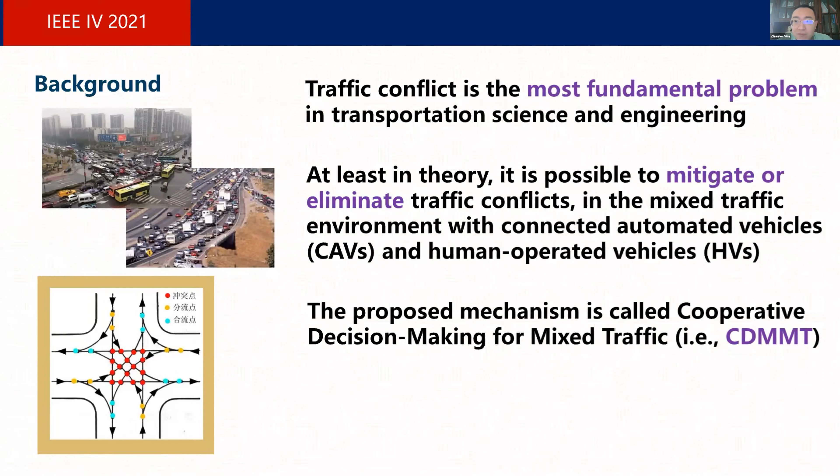I personally call this problem cooperative decision making, and of course it's also related to control. My group calls it CDMMT, cooperative decision making for mixed traffic. That's the background of this problem. I presume most of us know this well because we are from the same field.

We're talking about different levels of automation for connected automated vehicles and different levels of connectivity. In academia, people are focusing on different things compared to the industry. From my perspective, we focus on the problem with higher level of connectivity and also automation. I keep tracking some of the news related to connected automated vehicles, so most of us know these news or problems well.

There are some key challenges, including technical difficulties such as hardware, sensing technologies, communication, and also mixed traffic, which really makes the problem much more difficult because now we have people involved, and we know humans are myopic, stochastic, and usually non-cooperative, which really makes the problem very difficult.

The key message I want to convey here is, from the system perspective, we really want the system to be efficient. By saying cooperative, we really want the system to be improving, because cooperation is not necessarily system improving. In some cases, for example in this ramp merging scenario, we have a ramp vehicle trying to merge onto the main line, but to ensure this merge activity, we may want a platoon of vehicles on the main line to slow down, and that case is not necessarily system improving. So what I want to say is, to design efficient control technologies or decision-making strategies in mixed traffic environments, we really need to pay attention to the system efficiency problem.

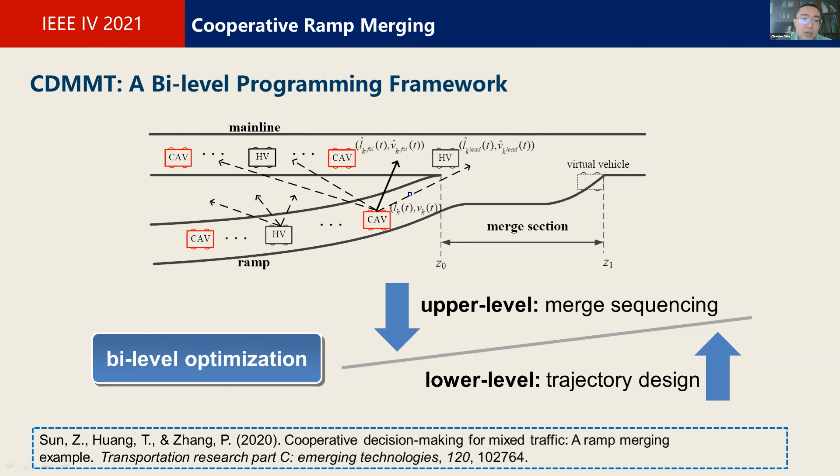In this ramp merging scenario, we think this problem can be modeled by a bi-level programming framework. In the upper level, it's essentially a merge sequencing problem, in which the CAV tries to seek appropriate gaps on the main line to fulfill the merge maneuver. The lower level problem is essentially a trajectory design problem - how to design the trajectories. So essentially that's a bi-level optimization framework.

So basically the upper level, that's the merge sequencing. Let's look at this problem. If you know this problem well, it's essentially equivalent to: we have a couple of gaps on the main line, and we try to decide which gap for a target vehicle to merge. This problem can be very well addressed using the dynamic programming framework.

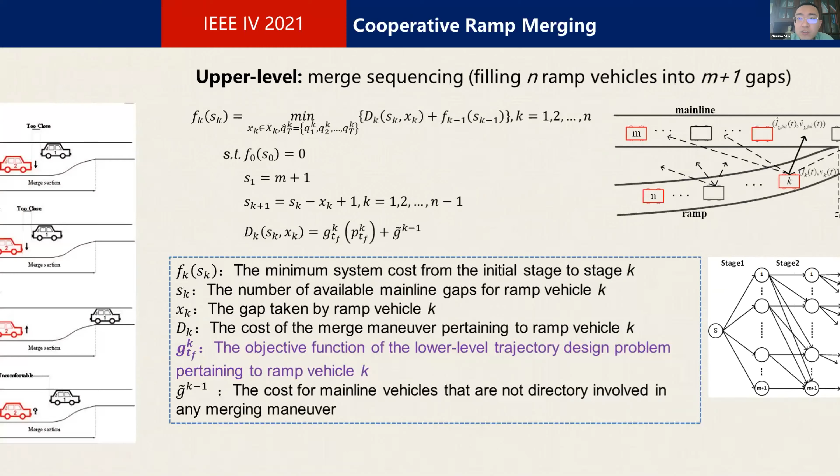So that's some dynamic programming formulations, but I don't want to talk too much on the mathematical details. Also in the mixed traffic environment, the harder part is we need to capture all possible scenarios that can potentially occur. In this case, we categorize basically 13 scenarios that can possibly occur in the mixed traffic environment.

So with respect to the mainline leader, the mainline follower, and the target vehicle, which is the ramp vehicle - the vehicle could be autonomous vehicle, represented by A, or human operated vehicle, represented by H here. Also in some cases, there are only 2 vehicles involved in each merge maneuver, and in that case we have a placeholder N here, for scenario 8 up to scenario 13. So those 13 scenarios should capture all possible cases that can appear in this car-following context.

And also with respect to the reason why a ramp vehicle - let's say vehicle 2 - cannot easily merge onto the main line, there are also some possible scenarios. For example, this ramp car could be too close to the mainline leader, or too close to the mainline follower. So there are essentially different reasons that prohibit smooth merging for this problem, and we need to explicitly consider all those scenarios.

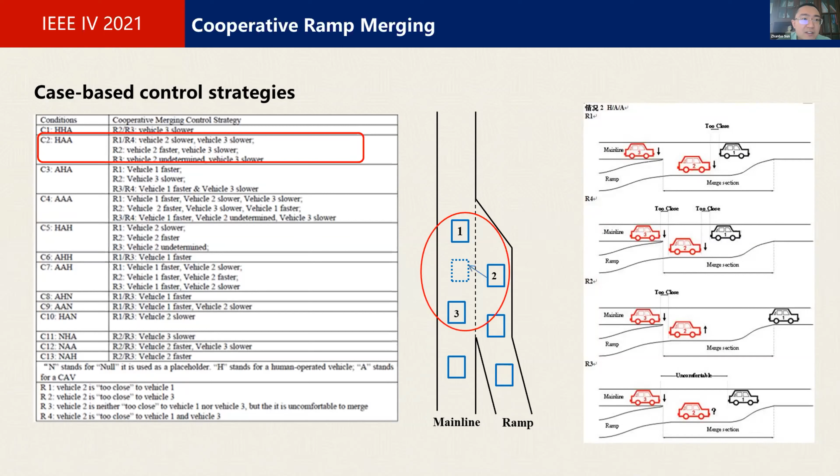So with that, the lower level problem is essentially a trajectory design problem. In this case, we are looking at multiple vehicles involved - could be 2 or 3 vehicles involved in each lower level problem. So we are also formulating this using a DP type of approach. The harder part is essentially the modeling of the final state constraints, which is related to the lateral dynamics. But in this work, we didn't really consider very complex, detailed lateral control here.

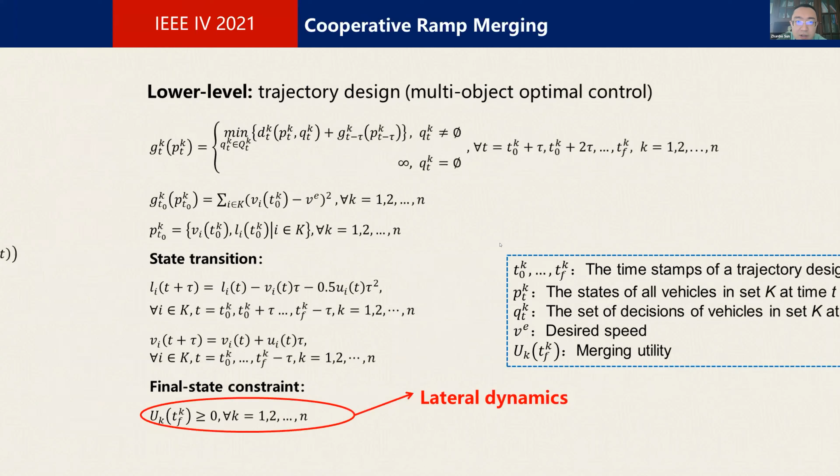So that's for when we have 3 vehicles involved: vehicle K, that's the ramp vehicle; vehicle K-lead is the mainline leader; vehicle K-follow is the mainline follower. We basically consider, for all these scenarios, in which scenarios vehicle K could be non-cooperative, could be controlled, could be faster, slower, and undetermined. We list all these possible options.

The lateral dynamics here could be a complicated problem, but here we consider a discrete choice - literally a ramp merging decision: lane change or merge. For the longitudinal dynamics, we tried basically different car-following models, including some well-known models like Gipps model, IDM, EIDM, and also some intelligent driving car-following models such as deep learning-based methods. In generic form, it can be written in this unified formulation.

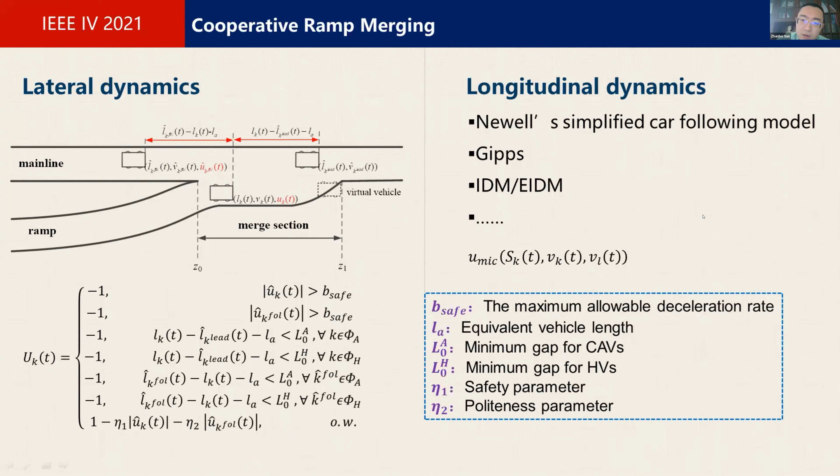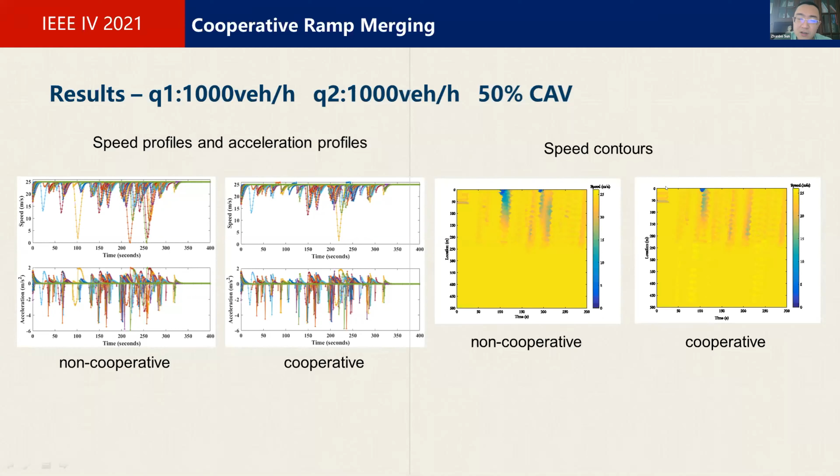To skip most of the mathematical details, let's directly come to the results. Here we show basically the speed-time profile, and also the acceleration-deceleration profile. We show that the cooperative case is much better compared to non-cooperative scenarios, and also in terms of the speed contour, which also shows that the cooperative case is much better.

For the following papers, I only want to talk about these very briefly, because I have limited time. In the first work, it's basically a deterministic scenario. As I said, the difficulty is really the system stochasticity, which is not quite considered in the first work. Also the computational efficiency is a problem, because eventually we are looking at some real-time control or real-time application.

So the solution to this is we look at closed loop control, in this case a model predictive control, and also to ensure computational efficiency, we basically propose a so-called hybrid centralized-decentralized system, because the previous work is mainly centralized. Here we propose a hybrid system that we show can solve this problem faster. Also for the lower level problem, it's an NP-hard problem. Here we use a computationally efficient solution approach to solve this lower level trajectory design problem. Okay, so let me skip.

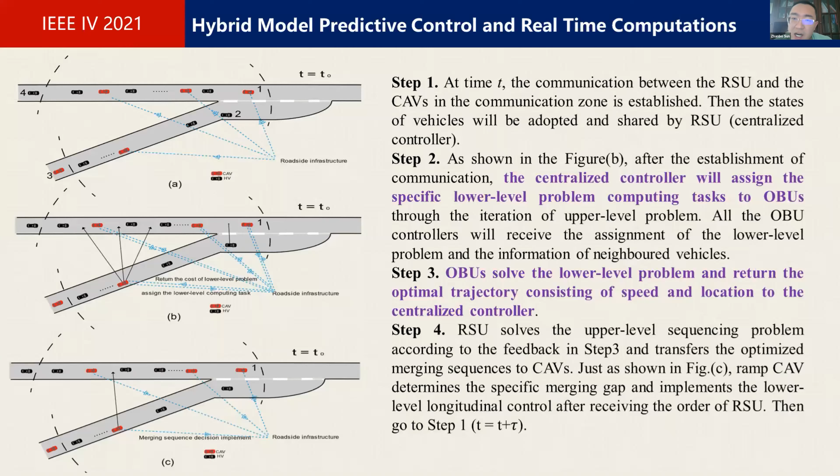So the idea here is we use some hybrid control. We have a centralized controller and a bunch of OBUs on each autonomous vehicle. The centralized control solves the sequencing problem and then passes the lower level computational tasks to each OBU on the smart vehicles. The smart vehicles solve the lower level problem and return the solution to the upper level. This hybrid approach can take advantage of the computational power of each smart vehicle.

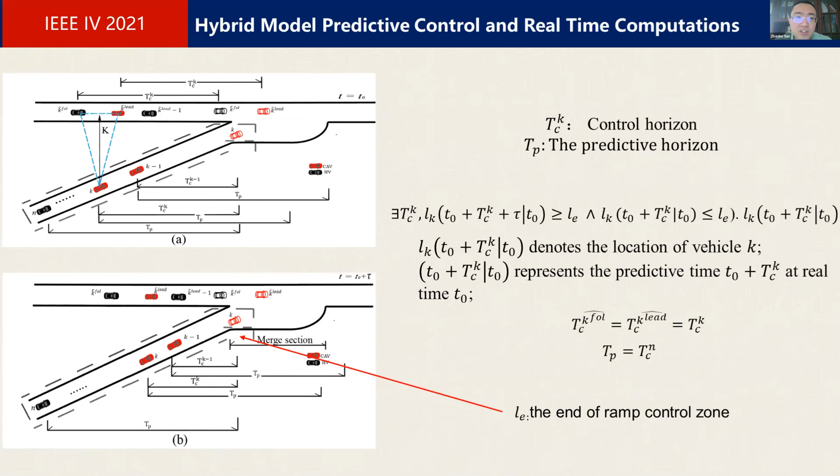Okay, let me skip this and come directly to the results. So basically, we use hybrid control, and we also test this closed loop MPC framework. We show that the MPC approach is more robust compared to open loop control, and also much better compared to the non-cooperative scenario.

Briefly, we are very excited about this concept called microscopic right-of-way trading. In previous work, we usually assumed that CAVs can be designed to be cooperative, but this conflicts with the self-interest nature of humans. So in this case, we assume vehicles can be categorized into cooperative and non-cooperative vehicles. We believe both CAVs and HVs can behave cooperatively if enough incentive is provided. Otherwise, without incentive, it's not safe to assume CAVs will behave cooperatively.

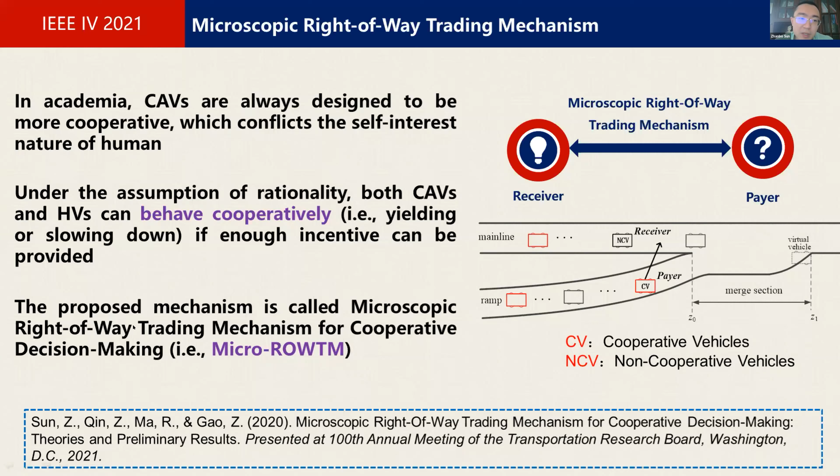So this mechanism is called microscopic right-of-way trading. We are talking about right-of-way trading in mixed traffic, at the microscopic level rather than tradable road tickets as used in traffic management. It's a game theoretical approach - we need to address the trade-off between individual rationality and system efficiency, and design the problem for incentive compatibility. Here we use the dominant strategy incentive compatibility approach, which can guarantee minimization.

These are just some brief definitions. We assume the ramp vehicle could be a payer, offering money to the mainline follower who's going to behave cooperatively, and the receiver is essentially the mainline follower who's going to behave cooperatively. There are a couple of rules we tested - for example, equal allocation, which allocates the total revenue equally among the two participants. There are also other rules, some more advanced in that they can minimize envy.

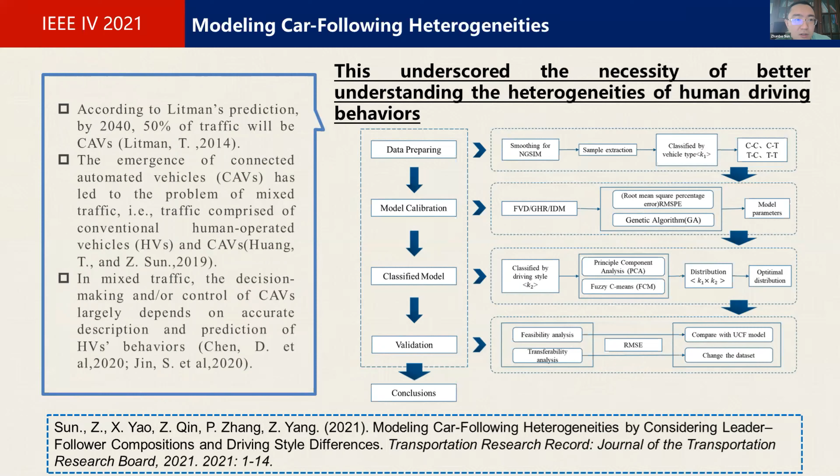I think I still have a little time, but let me quickly go through this. So modeling car-following heterogeneity is for better short-time trajectory prediction. Let me just quickly scan through these things. We came up with a statistical modeling based framework that can be used to better describe the heterogeneity of human driving behaviors in a microscopic sense. Let me quickly scan through this part too. For short-term trajectory prediction, this is a hot field because people are using deep learning methods for trajectory planning and trajectory prediction.

In the aforementioned cooperative decision-making tasks, these basically rely on accurate estimation and prediction of trajectory in the short term. The predicted trajectory serves as a key input to our previous problems. So in this case, we use a graphic representation learning method combined with LSTM for short-term trajectory prediction. The key here is that graphic-based representation learning can better capture the spatial interactions between vehicles on the road, which is more intuitive compared to black box deep learning techniques.

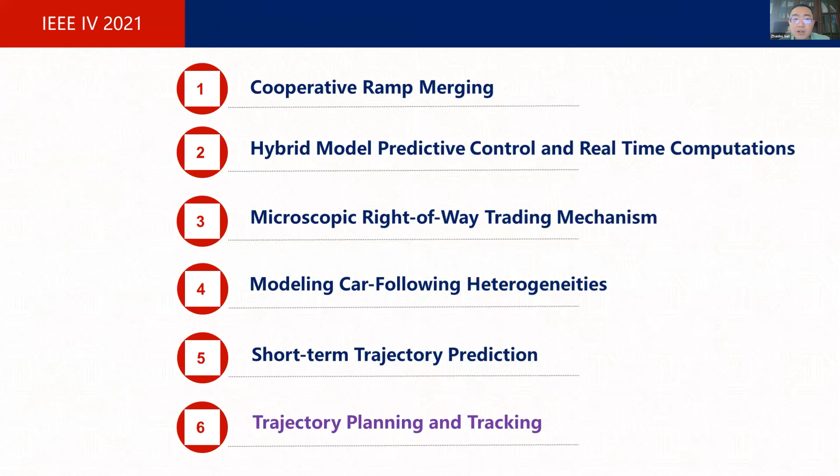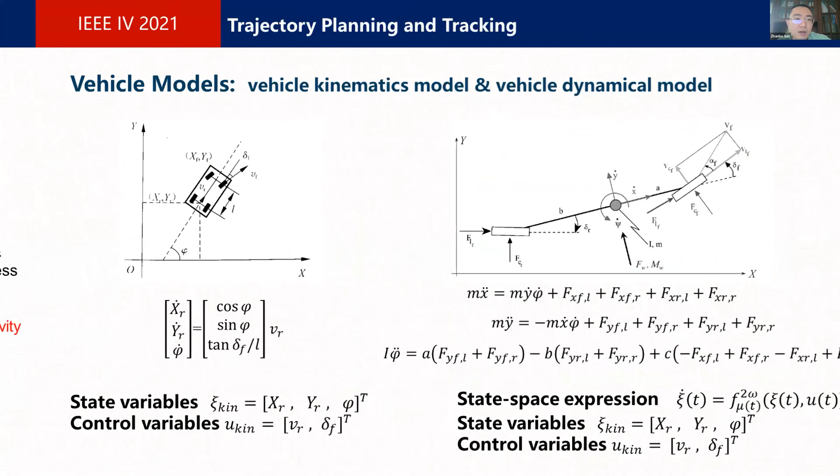Quickly scan through this part. So for all these five topics that I mentioned before, they're mainly on the decision-making level. The last part is essentially trajectory planning and tracking, which is more on the technical level. But since I'm running out of time, I'd rather skip that part, because I want to leave more time for questions.

So the future directions may include some integration of trajectory planning and trajectory tracking, considering trajectory replanning. Also, we're talking about time delay systems if we want to really implement this in real time, so that time delay problem has to be considered. And also there are some challenges in microscopic right-of-way trading, and the stochasticity in the problem needs to be better encapsulated. We also want to generalize this problem to other scenarios, including intersections and so on, and road test experiments, because the above discussions are mainly based on simulation and numerical results.

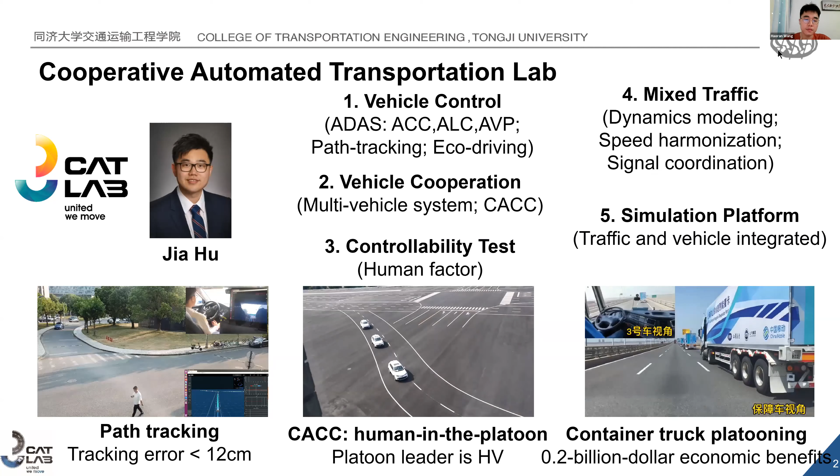Now I will give my presentation on CACC lane change. It covers the following aspects: motivation, methodology, and evaluation. At first, I want to give the motivation of my CACC lane change controller.

Transportation is now facing 3 main challenges: mobility, safety, and sustainability. Traffic congestion problem is increasingly serious all over the world. Over 400 cities in 56 countries are experiencing increasing levels of traffic congestion. Because of traffic congestion, people spend more time compared to free flow periods. Reports show that 5.5 billion hours of travel delay and $121 billion cost every year is caused by the traffic congestion in the US.

Safety problem is also very severe. Reports show that over 37,000 traffic fatalities are caused in the US in 2017. Traffic crash has been the leading cause of death for ages from 11 to 27. Here we list the main cause factors of crash. Most of the factors are driver related.

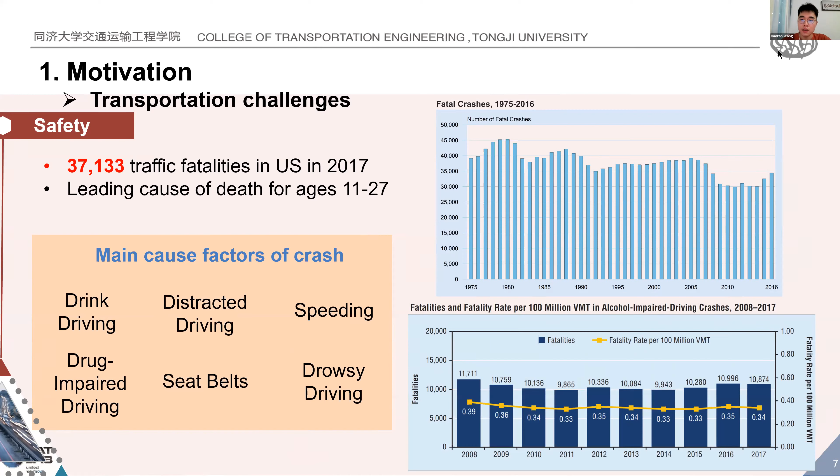As for sustainability, road transportation leads to 2.9 billion gallons of wasted fuel and 56 billion pounds of additional carbon dioxide every year. In order to address these challenges, cooperation is given great expectation. Cooperation among pedestrian, vehicle, and infrastructure could be achieved by portable smart devices, CAVs, and intelligent transportation systems.

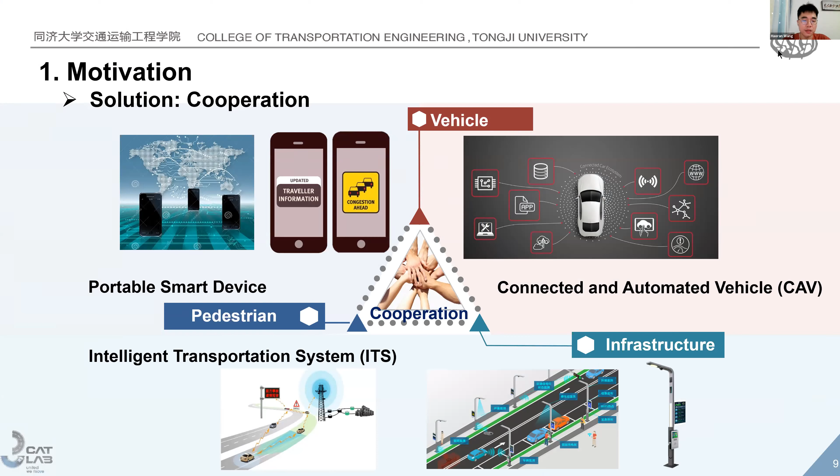As an important application of CAV, CACC, cooperative adaptive cruise control, is now in rapid development. CACC is proposed by adopting V2X communication added to ACC. Conventional ACC could reduce driving load and improve driving experience. CACC is expected to bring more positive effects. Smaller headway will benefit driving mobility. Adopting these technologies may achieve sustainability, and automatic control will reduce driving error and improve driving safety.

However, conventional CACC is longitudinal only. By enabling CVs in a platoon with lateral control, CACC is now given a new opportunity: CACC with lane change capability.

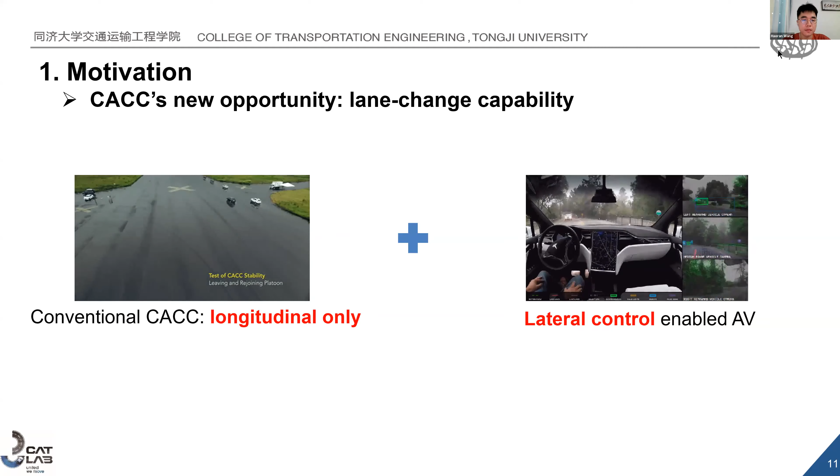Let's consider these scenarios. First, the scenario on the left: the dark blue vehicles are CVs in platoon. The white vehicles are surrounding human-driven vehicles, mixed in the traffic. It is very usual that there is a slow-moving HV in front of the platoon. In this scenario, a longitudinal-only CACC would cause great loss of mobility.

The scenario on the right illustrates another case. The dark blue CVs are in platoon, and they must change lane and run into the off-ramp. If the system is without lane change capability, the platoon has to be disengaged. This may break the control continuity.

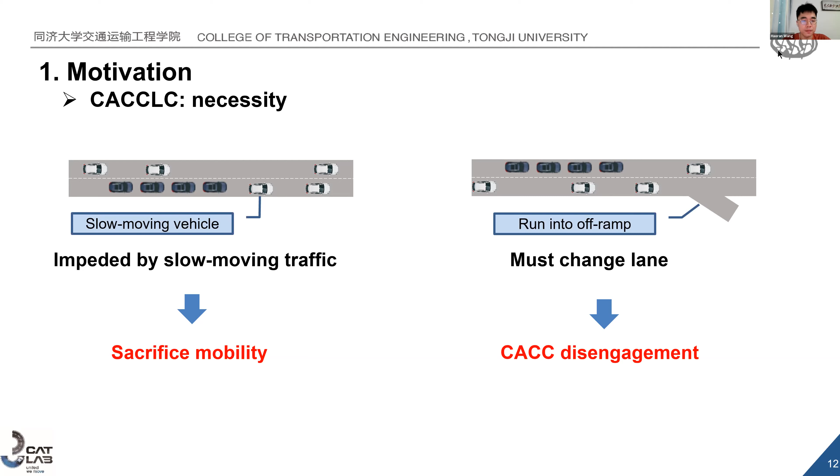Now we consider the scenario aforementioned in the right figure. We assume a platoon with 5 CVs. Following headway in the platoon is 1 second, and the cruising speed is 30 meters per second. 5 multiplied by 1 multiplied by 30 equals 150. Therefore, the length of a platoon in cruising is over 150 meters. It means a 150 meter gap shall be found to make a lane change.

This gap indicates 10.75 traffic density, the level of service A. We can see that in this case, the conventional simultaneous platoon lane change method can only be applied in traffic with level of service A. This greatly limits the implementation of platoon lane change. So the conventional SPLC method has low change capability.

Considering these limitations, we propose a new CACC lane change controller. This controller is capable of making space to change lane.

At step 1, a gap should be selected even if it is not enough for a single vehicle's lane change. At step 2, the last CV changes lane to the gap. At step 3, the last CV slows down to open the gap. At step 4, the gap is enough to hold one more vehicle, so the last but one CV changes lane.

Just like this, all CVs in the platoon could change lane into the gap in turns. This method ensures the lane change process won't be interrupted. It is nearly with 100% success rate.

Applying this concept, we now propose a platoon lane change controller. Its methodology is presented in this section. This figure shows the control framework. It consists of 3 modules.

Module 1 is in charge of platoon decision making. It decides the gap to be selected for the lane change, and the information of vehicles, including CAVs and HVs, are passed to Module 2.

Module 2 is the planning module. It plans trajectory by the proposed CACC lane change controller. Module 3 receives the control command from Module 2 and actuates the control commands.

Applying this framework, we show the developed platoon decision maker and the CACC lane change controller.

Since the front CAV should follow its rear CAV to change lane, a new information topology is proposed here. In this topology, information is passed from the rear CAV to the adjacent front CAV.

A simple rule-based platoon decision maker is proposed. It includes lane change decision making and desired speed decision making. A gap enough for a CAV lane change maneuver could be used for the platoon lane change.

For the desired speed decision making, it follows a simple rule. The last CAV changes lane at a speed same as the rear HV. When the last CAV finishes lane change, it should decelerate to open the gap.

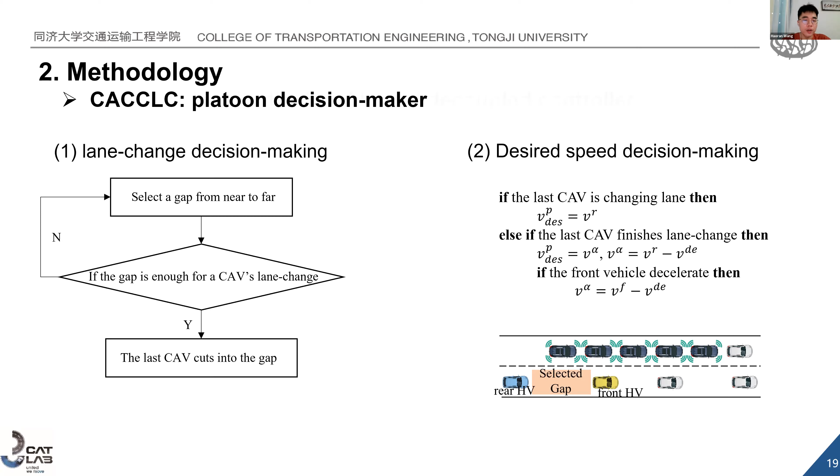We then propose a longitudinal and lateral decoupled controller, the CACC lane change controller. Speed and gap error with respect to the rear adjacent CAV are selected into the state vector. Heading error and lateral position error are selected into the lateral state vector.

Acceleration of all CAVs is selected as the longitudinal control vector. Front wheel angle is selected as the lateral control vector. Moreover, a linearized vehicle dynamics model is adopted.

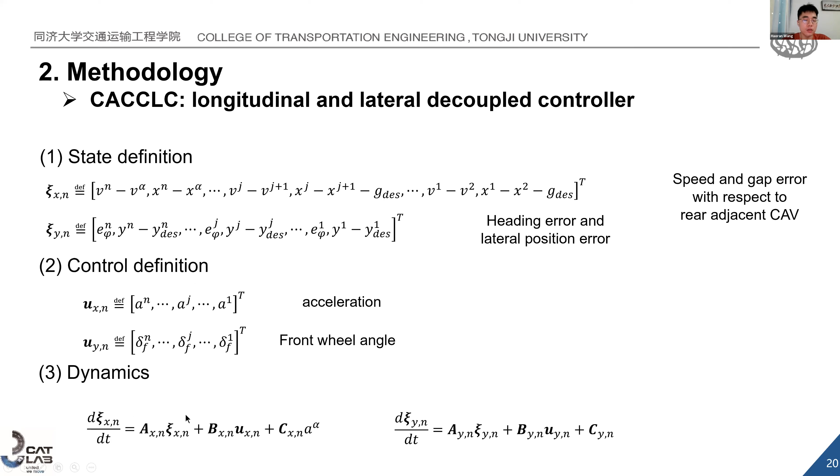Cost functions are given in quadratic forms. The longitudinal objective is to minimize speed error and gap error with respect to the rear CAV. The lateral objective is to change lane at the desired position.

Moreover, we have proven this CACC controller is with string stability. Oscillation won't increase from the last CAV to the first CAV along the communication topology.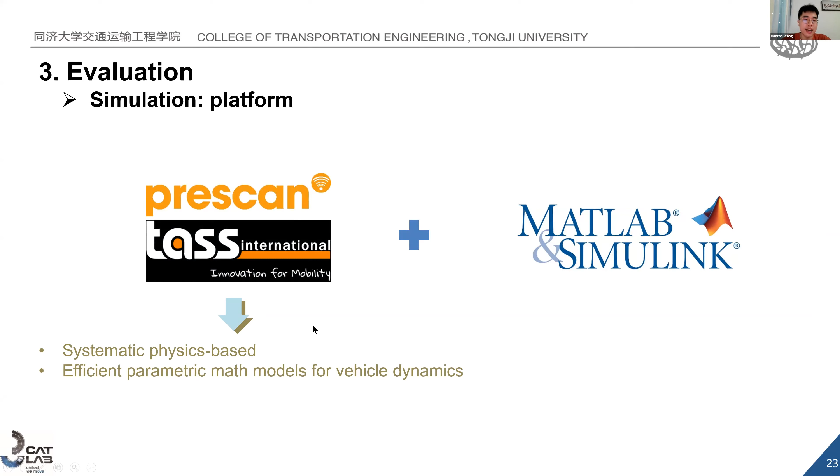At last, the CAV platoon lane change controller is evaluated on a simulation platform joint with PreScan and Simulink. PreScan is an ADAS and IV system simulation software. It follows a systematic physics-based simulation approach. Efficient parametric math models reproduce system-level dynamics behavior.

This simulation is with two objectives. The first objective is function validation; it should verify the function of making space to change lane. The second objective is string stability evaluation. The following gap error is adopted as the measurement of effectiveness.

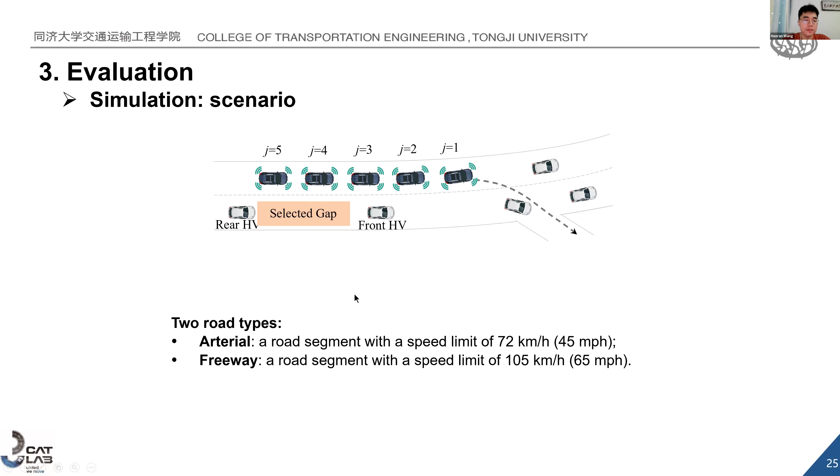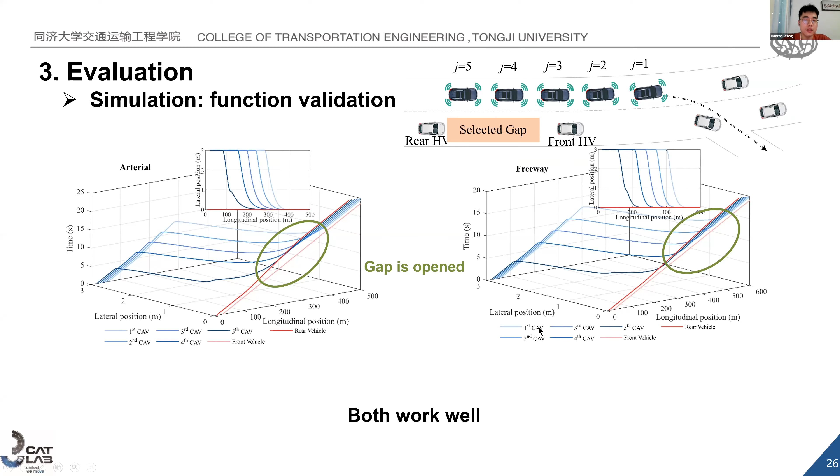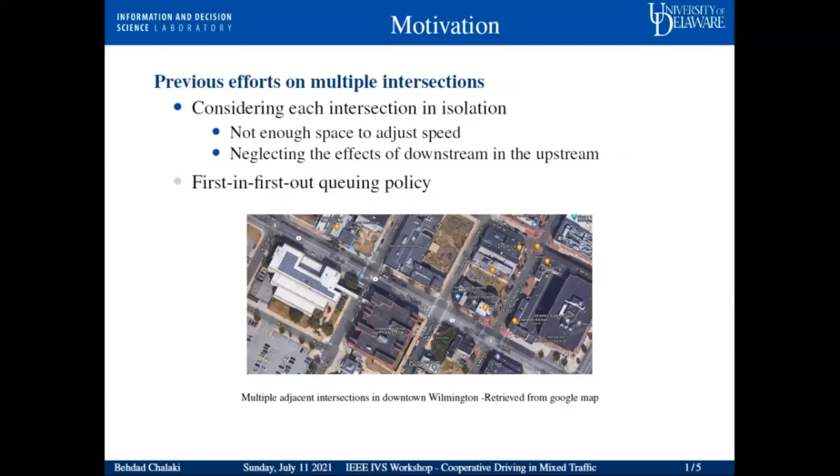Also, another approach which is very popular in single intersections is using first-in-first-out queuing policy, or FIFO, to find the arrival time at the intersection to avoid lateral collision. But this approach would be degraded if we have asymmetric geometry or asymmetric traffic flow. So if from one leg of the intersection we have high traffic flow compared to other legs, FIFO would perform worse than the scenario when we have symmetric traffic volume.

So the problem we're trying to address: we are looking to find a decentralized coordination framework for CAVs at full multi-lane signal-free intersections to improve traffic throughput and energy efficiency. We are also allowing vehicles to choose the best lane to improve the throughput of the system. And we further extend our framework to include the steady state error that may occur in tracking the optimal trajectory at the vehicle level controller.

So we are considering two intersections which are close in distance from each other. We have an area where vehicles can communicate with each other, called the control zone. There's also a red area at the entry of this control zone, where vehicles may change lanes based on the throughput of the system. So if changing lane can improve the throughput of the system, they do so. We also have two regions where vehicles may have lateral collision, called merging zones. This is one example for two intersections; we generalize this for multiple intersections in the paper.

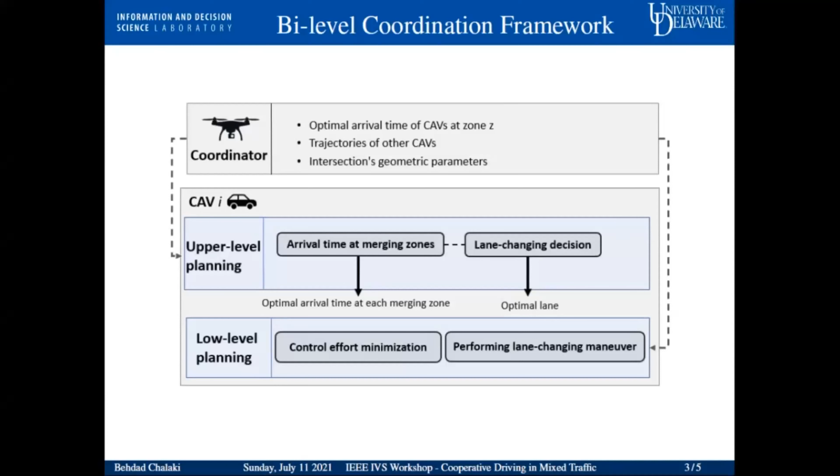We also have in our upper level planning a lane changing decision, where the vehicle may choose other lanes. These two decisions pass to the low level planning, where we have control effort minimization, minimizing acceleration or deceleration of the vehicle over time while inside the control zone, with interior point constraints being the arrival times at different merging zones. We also have state and control constraints, such as rear-end safety constraint, control input constraint, and speed constraint. If the vehicle does a lane changing maneuver - if its optimal lane is different from the lane it enters the control zone with - it needs to perform the lane changing maneuver as well.

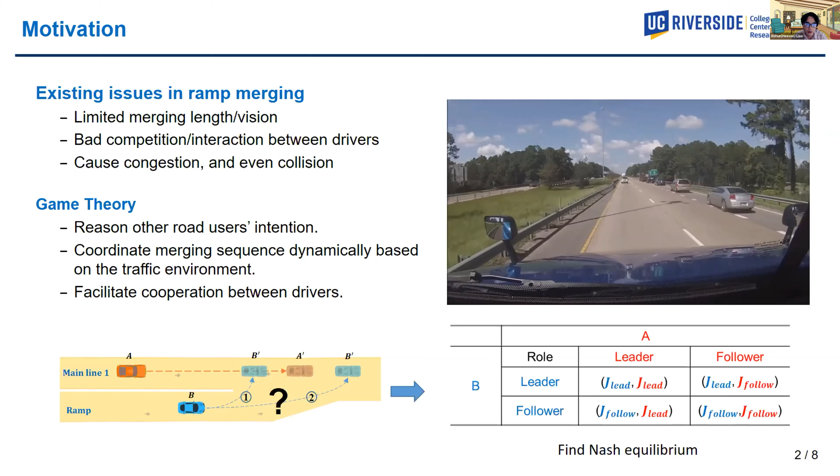Therefore, we want to bring in game theory. For this case, we can formulate a game where A and B compete for merging priority, and each vehicle tries to maximize its reward by choosing either to be a leader or a follower. Each vehicle tries to figure out what the Nash equilibrium is and then find the answer. So this workflow is designed for CAVs, which can determine a dynamic merging sequence and provide corresponding longitudinal control.

Each CAV will walk through six main modules at each time step, from module A to module F. Module A projects the detected vehicle into the future to see if any conflict exists within a given prediction window. If there's a conflict, avoiding it should always be our first choice.

So we have our module B decide for the mainline vehicle. The vehicle in mainline 1 can always change its lane to the left in advance to avoid the conflict with the ramp vehicles. So what if the conflict cannot be avoided?

Then we would need our following game theory decision-making modules. First, we need module C to categorize what kind of potential competitors they are—is it a CAV or a human-driven vehicle?

If there are two CAVs in the game, module D will form a cooperative game, and these two CAVs can communicate with each other and make decisions together. Otherwise, the CAV will maximize its own reward.

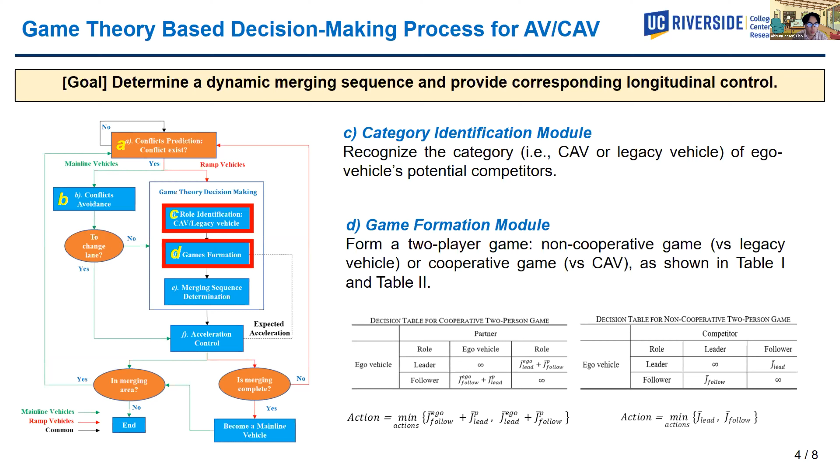Then we have module E for determining the merging sequence. By considering the cost function, which includes merging risk, mobility, and comfort, it can select an action—either being a follower or leader—for our ego CAV. Then the final module is the acceleration control module, which executes the decision from module E, including longitudinal speed control, lane tracking, and lane changing behavior.

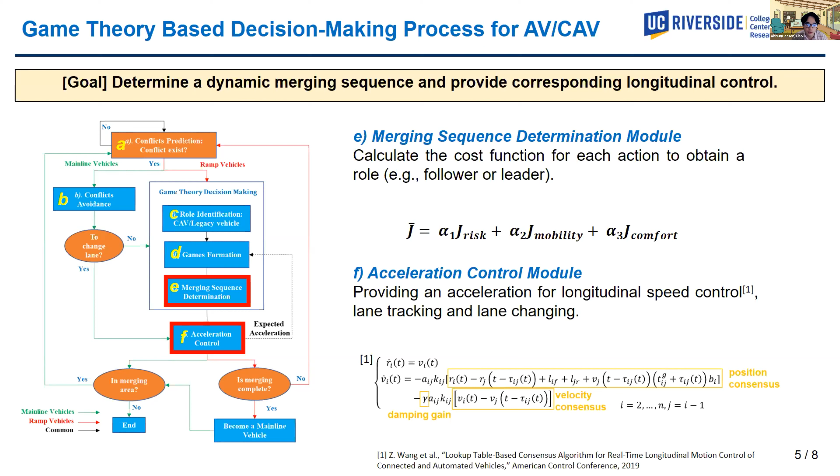So here comes the part of how we evaluate our algorithm. Many current simulation platforms, such as Unity driving simulator and SUMO as a traffic simulator, have their pros and cons, and only using one of them is not enough for studying mixed traffic and human interaction.

So to carry out this mixed traffic flow simulation, we uniquely built a co-simulation platform that consists of a driving simulator and a traffic simulator, which can provide an authentic traffic environment. In this platform, we model a one-to-one real-world scenario in Unity, and as figure B shows, we program the CAV in red and the human-driven vehicle in white, with the spread of the red line indicating the detection range of the CAV's radar.

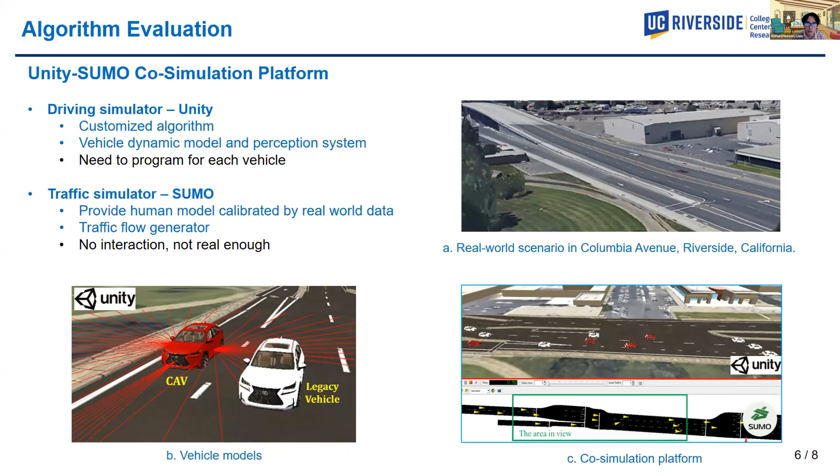And this is the result video we carried out; we evaluate our algorithm in our platform. First, the first video presents how the CAV in this yellow circle performs the car following behavior under the control of our acceleration module. And our second video shows how the conflict avoidance of the mainline vehicle works.

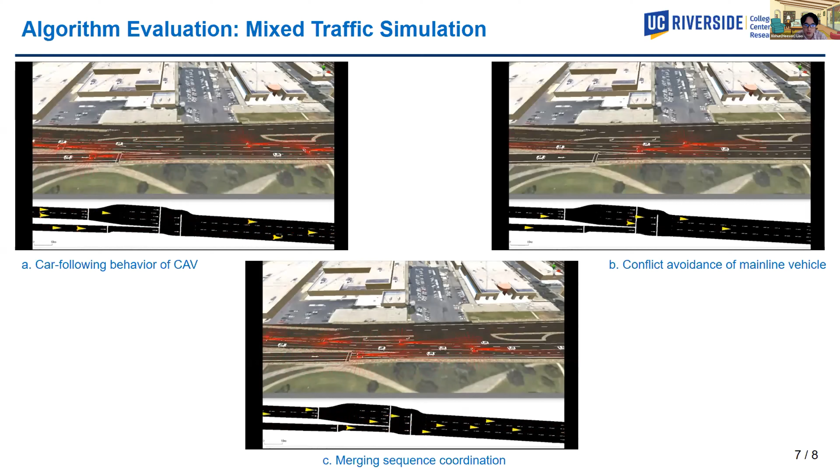In this red circle, these two CAVs can avoid the conflict. And the third video shows how the CAV reacts to the legacy vehicle, and then follows the coordinated sequence and finishes the ramp merging.

Finally, we verify our algorithm in a traffic flow level simulation, considering different penetration rates from 0% to 100%, from light traffic to congested traffic. The average speed of the traffic flow can be increased up to 210%, and the fuel consumption can be reduced up to 54%. Finally, the driving volatility can be stabilized to a 0% level. So that's a very good result for using this game theory-based merging algorithm.

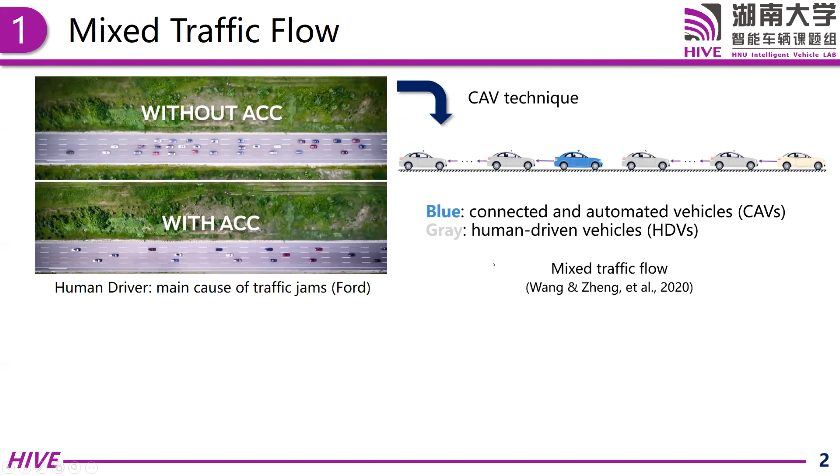The first question is, how does a small scale of CAVs benefit traffic performance? There are already some studies on this topic.

The second question is, how will the formation and penetration of CAVs influence mixed traffic flow? There is already some work on merging control in mixed traffic flow, but there are still no studies on platoon control. So our study aims to answer this question for platooning control in mixed traffic flow. We consider the following condition.

There is one connected and automated vehicle, and it has M preceding human-driven vehicles and N following human-driven vehicles. The CAV can obtain information from these human-driven vehicles. So this group of vehicles consists of a mini platoon in the traffic flow.

Why do we consider the human-driven vehicles behind? Traditionally, it's common to consider only the human-driven vehicles ahead in the framework of connected cruise control. But in our study, we consider not only the looking-ahead case but also the looking-behind case, because we believe this can help increase the string stability of the mini platoon, as shown below.

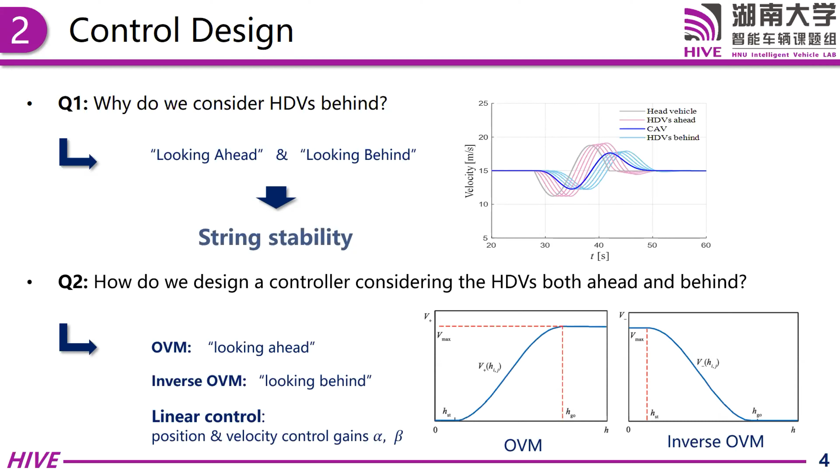Under these settings, we analyze the string stability of the mini platoon using the head-to-tail transfer function. The transfer function is given here, where y_n tilde is the velocity tracking error of vehicle n, and y_0 tilde is the velocity vibration amplitude of vehicle 0.

From this transfer function, we find that the position of the CAV, or the index i, does not affect the transfer function. On the contrary, the topology M and N, the platoon size N, and the control gains alpha and beta all affect the transfer function.

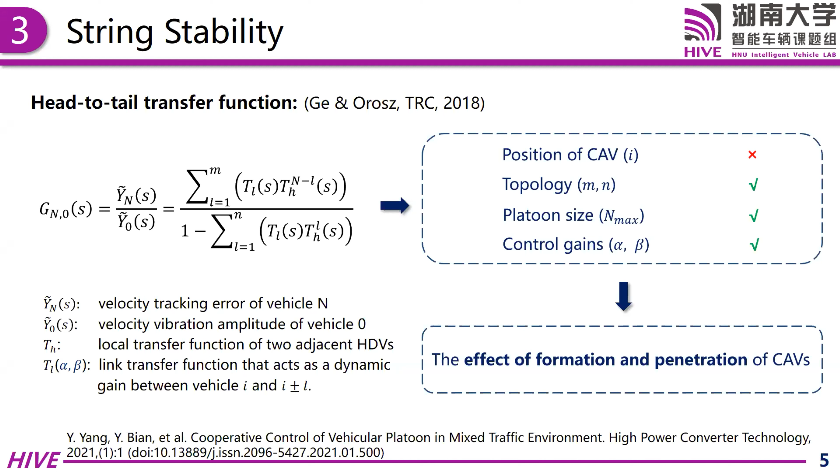Next, we analyze the effect of the formation and penetration of CAVs in the mini platoon. The first result is that, given a fixed N, we analyze the transfer function for three cases.

Case A is M equals 1 and N equals 5, so the CAV has 1 preceding vehicle and 5 following vehicles. Case B is M equals 3 and N equals 3. Case C is M equals 5 and N equals 1.

From these figures, we find that more information from the following human-driven vehicles gives better string stability. This is opposite to the traditional concept of string stability, because we usually rely on many preceding vehicles, but this result tells us that more information from the following human-driven vehicles also helps guarantee string stability.

The second result concerns the penetration of CAVs. We consider a fixed N and a fixed M. In this case, the figures show the stable domain of the control gains alpha and beta. As shown, with a given upper bound of alpha and beta, the maximum number of vehicles in the platoon is N to guarantee head-to-tail string stability.

This tells us that a connected and automated vehicle can stabilize a maximum of 7 human-driven vehicles. So if all vehicles on the highway are organized in this way, the minimum penetration rate is 1/7 to guarantee string stability.

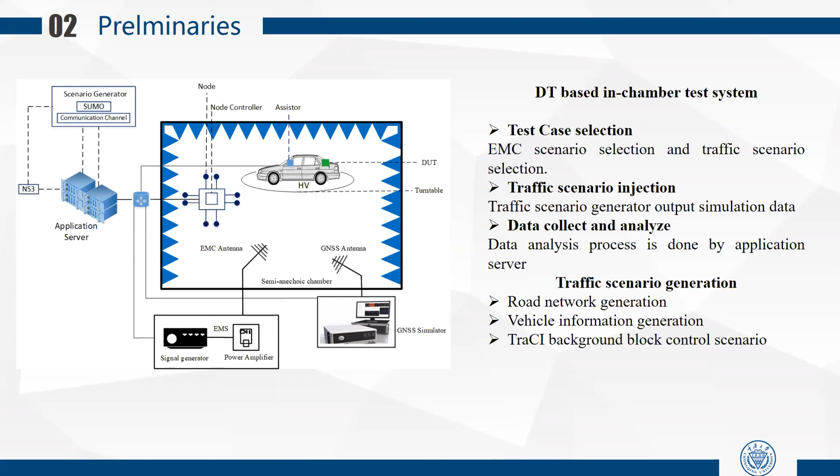The corresponding test procedure includes test case selection, traffic scenario injection, and test data collection and analysis. As mentioned earlier, in the proposed system, all traffic scenarios are generated by SUMO. The generation process includes three key points: road network generation, vehicle information generation, and the TraCI background block control scenario.

The third part is the improved model. In the original Krauss model, the safe following model is defined as Formula 1. Considering the influence of following vehicle velocity, we defined the safe following distance as Formula 2. Based on Formula 2, we construct the deceleration model, acceleration model, and acceleration-deceleration conversion model.

First, let's expand the deceleration model. Obviously, the deceleration process is related to the braking process, which is denoted in Figure 1. It includes the driver's reaction phase, the braking force growth phase, and the continuous braking phase.

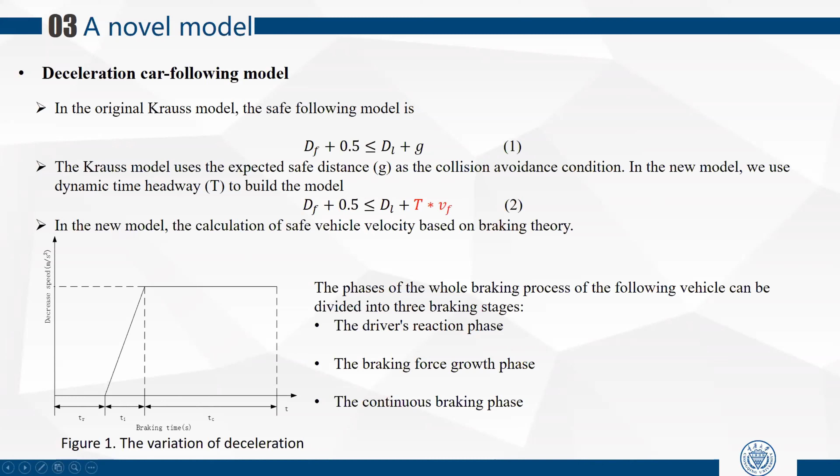For each stage, we can get the distance of each stage as Formula 3, 4, and 5. Summarizing the above three stages, the displacement of the following vehicle in the full braking stage is defined as Formula 6.

Consider that the vehicle in front can brake at any time, so the reaction stage of the driver of the leading vehicle may not be counted. So the displacement of the leading vehicle in the full braking stage is defined as Formula 7.

Combining Formula 2, 6, and 7, the safe velocity is defined as Formula 8. Finally, the vehicle desired velocity is defined as Formula 9.

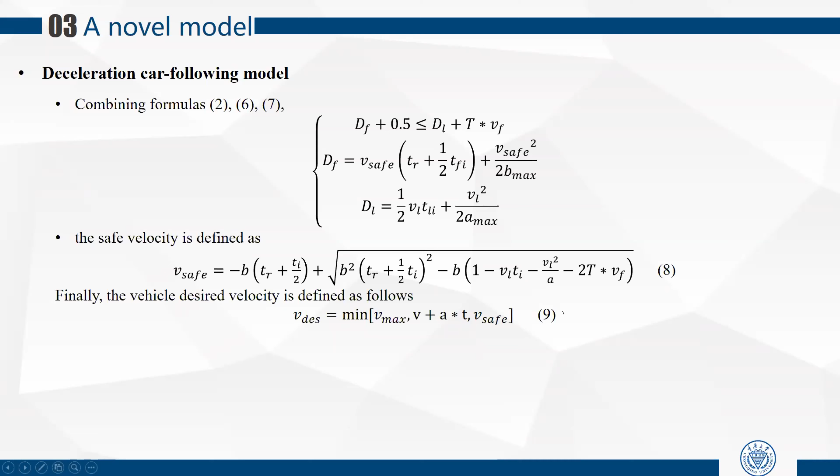Secondly, let me explain the acceleration model. Here we import the integral theorem to calculate the acceleration distance to get a smooth acceleration process.

Combining Formula 11, the acceleration time, and Formula 12, the vehicle driving boundary conditions, the maximum safe velocity in the acceleration curve form model is defined as Formula 13.

Third, let me explain the conversion mechanism. The acceleration-deceleration process is shown in Figure 2. From t to t plus T, the position of the following vehicle and the position of the leading vehicle could be denoted as Formula 14.

The distance between the two vehicles and the initial distance between the two vehicles is defined as Formula 15 and 16. Note here, if Vf is greater than Vl, the acceleration state should be changed to deceleration, and the converse is also true.

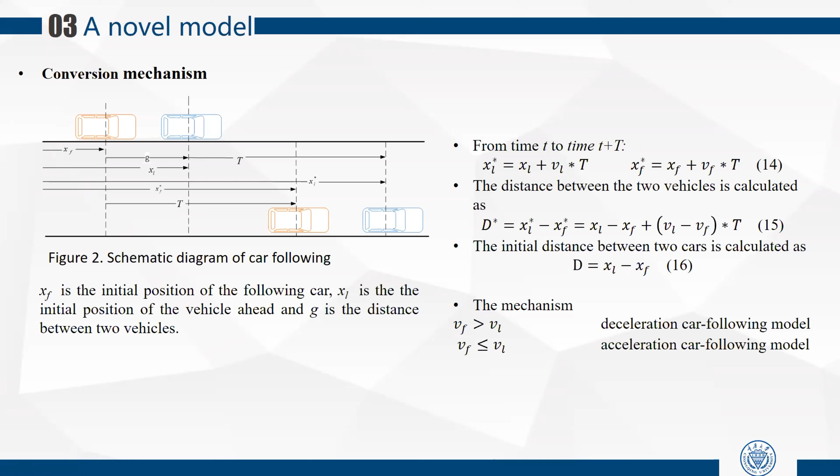To display the performance of SUMO-based simulation, here we select a crossroad scenario: Sanxia Branch Road and Shopping Bar Station North Road, Chongqing, as an example. 24 hours of traffic data from October 21, 2020 are used to generate simulation scenarios. As shown in the table, compared with the original model, the travel time, average vehicle density, road occupancy, and road average waiting time of the improved model have been significantly reduced, and the vehicle velocity has been significantly increased.

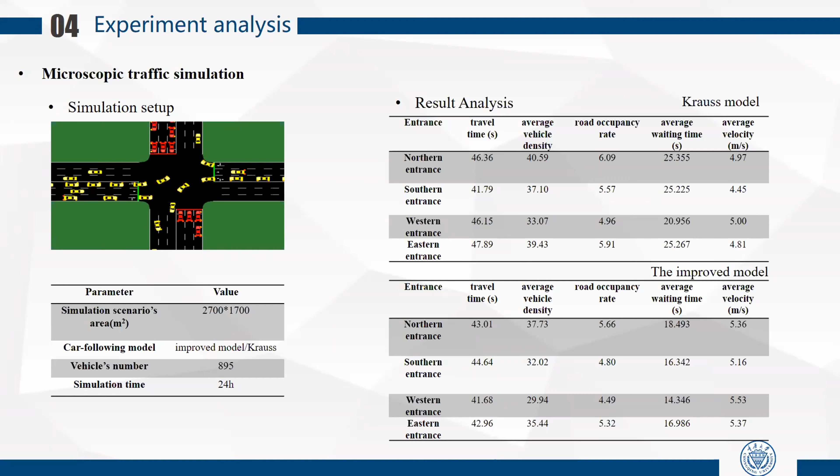A test system is designed to support the in-chamber V2X test, where a test example is given like this.

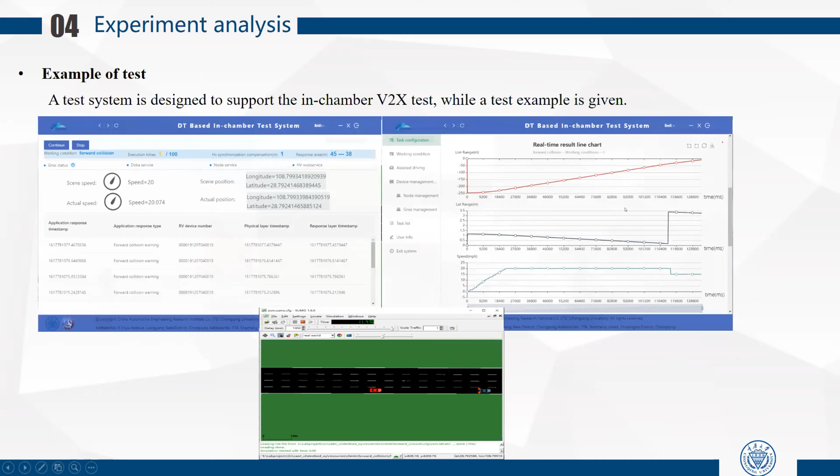The fifth part is the conclusion, to match the requirement of V2X oriented tests. In this paper, we designed the test procedure and explained the corresponding scenario control process. Moreover, to improve the reliability of the simulation, we define a safe following distance, which considers not only the distance between the leading and the following vehicle, but also the following vehicle's velocity.

Then an improved Krauss model, which includes the deceleration model, acceleration model, and acceleration-deceleration conversion model, is proposed. Simulation results show that the proposed model could reduce the probability of velocity stepping change and perform a smooth vehicle following effect.

And the test system is designed to support in-chamber V2X testing, where a test example is given. In our future work, we should consider communication interfaces and optimize the SUMO lane change model to match the demands of the V2X application test. That's all for my presentation.

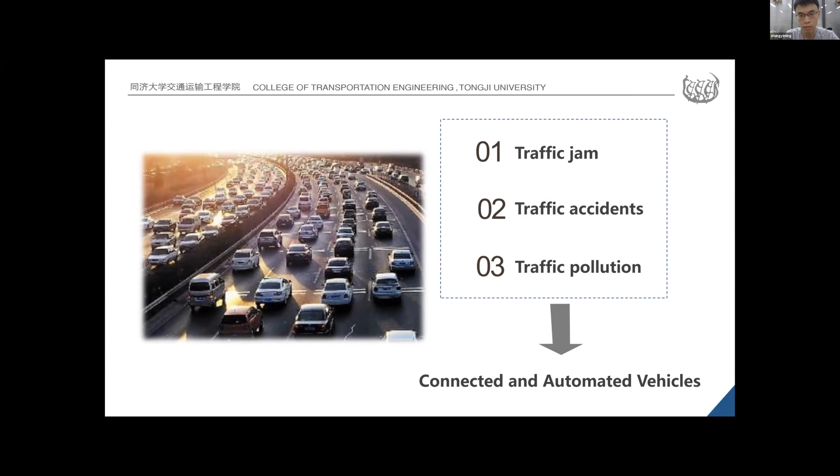Now let me clarify these two different concepts. For autonomous vehicles, it focuses on imitating human drivers. In other words, it can play the role that human drivers played in the past, including lane keeping, adaptive cruising, or collision avoidance. For cooperative automation, it focuses on cooperation. It can smooth traffic oscillations caused by human drivers and improve traffic efficiency.

Generally, there are 4 major benefits that CACC can bring. First, it can improve traffic safety by eliminating the human driver's reaction process. Secondly, it can smooth traffic oscillations caused by human drivers. Third, it can save labor force because only the leading vehicle needs a driver, which is very beneficial for companies' cost control. Lastly, it can reduce fuel consumption.

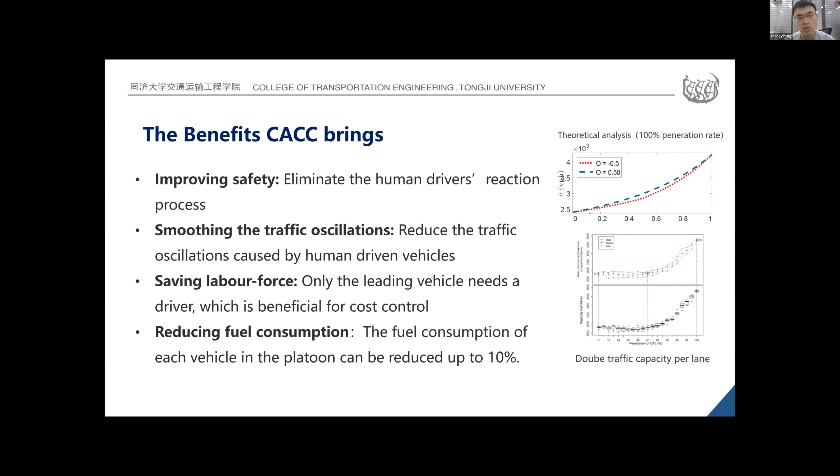According to theoretical analysis, the fuel consumption of each vehicle in a platoon can be reduced by up to 10%. Furthermore, from the figure presented on the right, we can see that the traffic capacity per lane can be doubled if the penetration rate achieves 100%. Okay, now let's continue with the second part.

First, that is the highlights of features.

First, our controller is modeled in a mixed function domain. It follows a constant time strategy. To be further, it can eliminate the prediction process by tracking the leader vehicle's history information. In other words, we didn't improve the prediction accuracy, we just eliminate the prediction process. In this way, it can greatly enhance the string stability and improve control accuracy.

Secondly, we introduce a dynamic matrix control, or DMC controller, to provide a bridge linking upper level command and lower level controller together. Meanwhile, it can adjust controller parameters adaptively according to real-time feedback. Generally speaking, it can improve driving safety and eliminate the brake jerk.

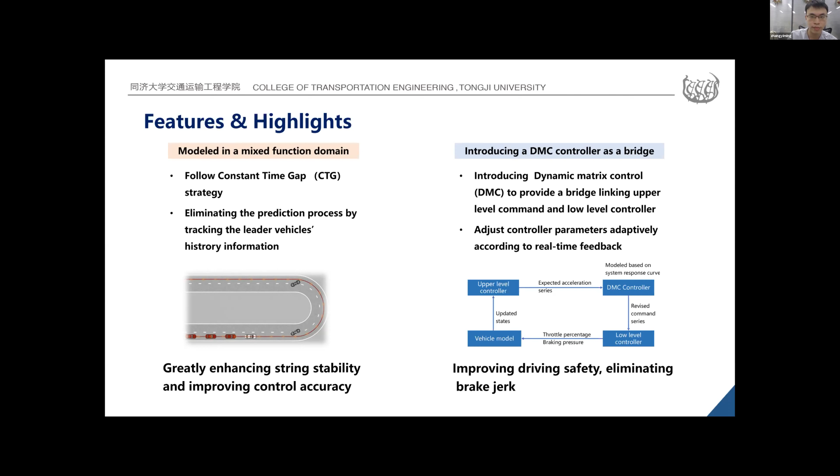Okay, now continue with the third part.

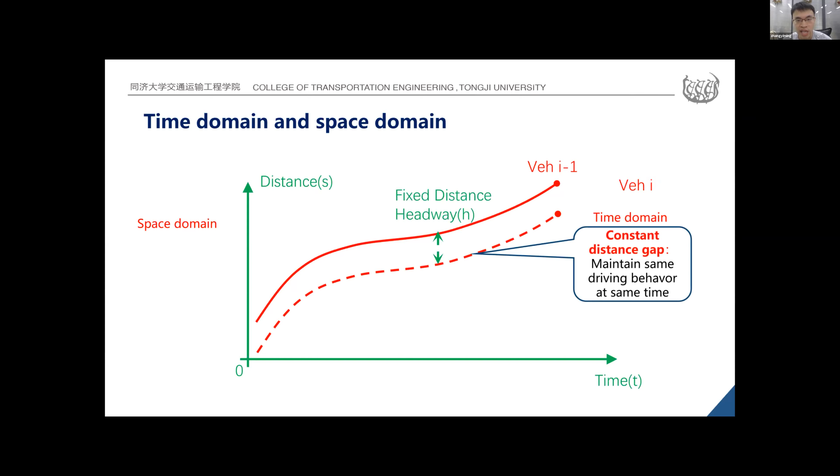This slide shows the difference between time domain and space domain. As is shown in the figure, the solid red curve shows the distance-time relationship of the leading vehicle. If you want to keep a constant distance gap, you can just shift the curve along the y-axis, which means you have to keep the same driving behavior at the same time.

In time domain, the derivative is with time. For example, the velocity equals the distance divided by time.

While in space domain, it means you can shift the curve along the x-axis. It means you have to maintain the same driving behavior at the same position, and in space domain the derivative is with space. For example, the corresponding variable of velocity in space domain is called slowness, or we simplify it as W. It equals time divided by space; it is the reciprocal of speed.

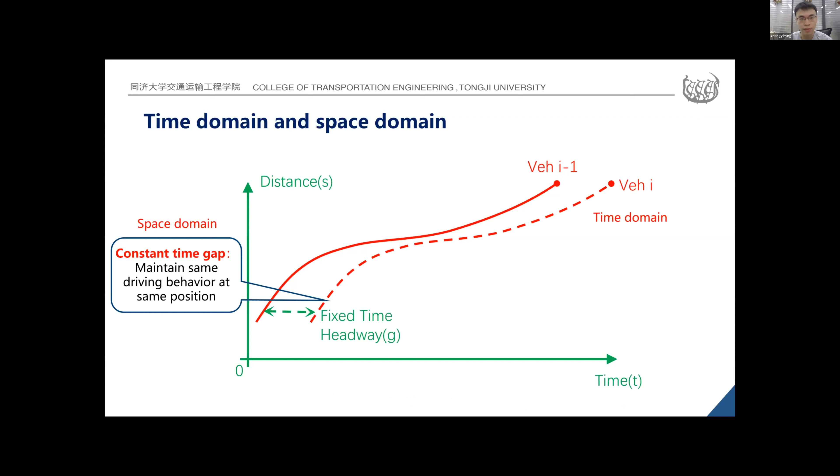The original form is modeled in space domain, and the control vector is a little difficult to understand. It is difficult to give a constant constraint and weight to cope with all driving conditions, because the controller has a cubic relationship with acceleration.

So we make some transformations to have the controller modeled in a mixed function domain. The controller has been transformed from moderation to acceleration. This transformation aims to make it more applicable to various driving conditions and more intuitive to comprehend. In this way, the system dynamics has been transformed from a linear time-varying problem to a linear time-invariant problem.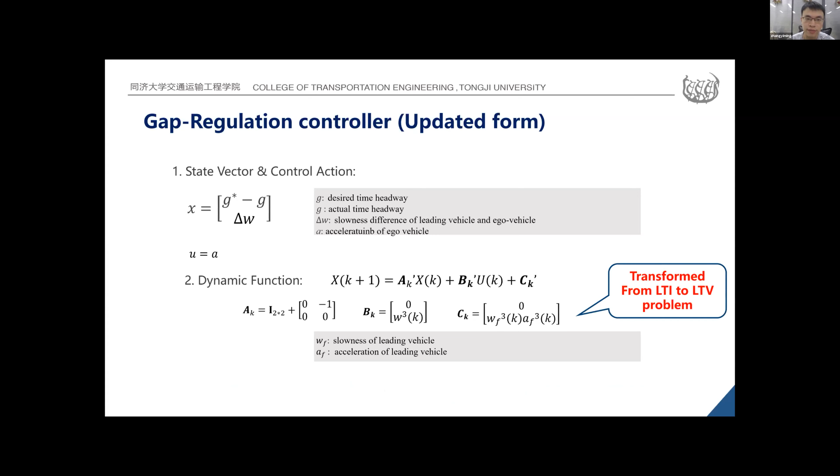The C matrix is the major disturbance. The cost function follows a classic quadratic form with three weight factors. You can set different values for each according to your preference. The solution is based on dynamic programming, and the computation time is small enough to be applied in reality.

Since the system response in the real world can be highly nonlinear and time varying, the assumption that the command can be executed immediately, or that it follows a first order process, is not realistic enough. This is the common method used in past literature.

Based on this, we proposed a dynamic matrix controller to link the upper-level controller and the low-level controller together. The system dynamics of the dynamic matrix controller is modeled based on the response curve of the vehicle. The purpose of this controller is to make the actual output acceleration as close to the expected acceleration as possible. For example, if you want to realize an acceleration of 1, you probably have to give a command of 2. To be further, the parameters would be calibrated according to the feedback.

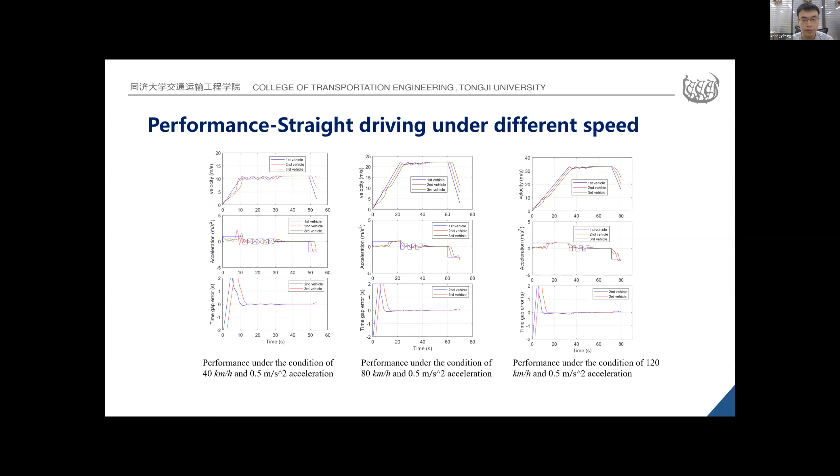To go further, we utilized the algorithm in truck platooning. The test vehicle is a SAIC Hongyan truck, and the load for the second vehicle is 20 tons, and for the third vehicle is 10 tons. Actually, it is quite heterogeneous. The result shows that the controller can perform well even under heterogeneous truck platooning driving conditions.

You can look at the figure above. The blue curve is the leading vehicle's speed profile, the red one is the speed profile for the second vehicle, and the yellow one is for the third vehicle. You can see from the figure that the disturbances caused by the leading vehicle can be smoothed by the platoon, because the fluctuation of the third vehicle is the smallest.

We also made a comparison with a controller from the literature, and the result shows that our controller outperforms the benchmark controller. In that controller, you can see in the homogeneous truck platooning situation, the third vehicle fluctuates much more than the first and second vehicles.

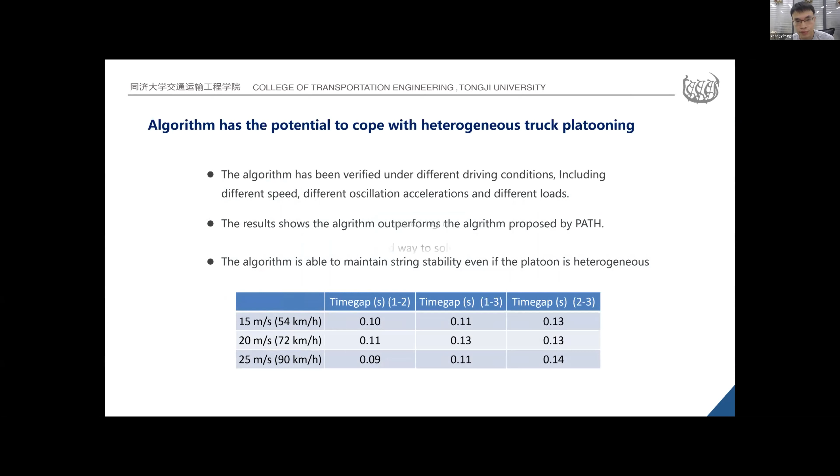To go further, we believe the constant time gap strategy is most suitable when considering string stability, because when considering the uncertainty and stochasticity of human driver leaders, speed varies rapidly. So the safety of the CSC platoon cannot be guaranteed when keeping a constant space gap, since predicting the future is quite difficult.

I think you mentioned 4 milliseconds for your algorithm. Is that based on the optimization of your algorithm for just one vehicle, or for multiple vehicles, or one vehicle on each computer? How do you calculate that time value? Actually, we tested the time both on our laptop and the computer on the vehicle. Both times were less than 5 milliseconds, so I think it is quite applicable to real applications.

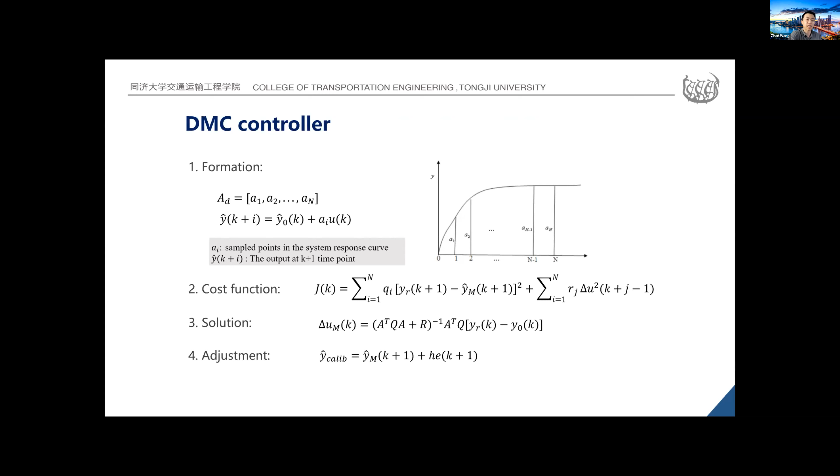And the result of the algorithm, is it just for one time step at a time, or for multiple time steps? We would update every 100 milliseconds each time. Actually, we have done a few tests, but they are not presented in this slide. We update the controller every 100 milliseconds, and it is for the whole calculation.

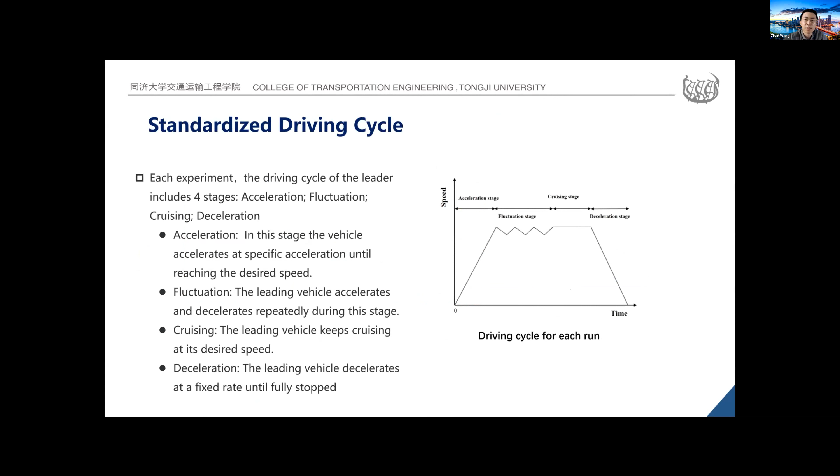Okay, understood. Yeah, thank you. And the second question: if you go to the trajectories of different vehicles, the results you mentioned there, the second vehicle has a load of something, the third vehicle, the truck platooning.

I noticed, for the speed-time curve, the plot on the right, the top one — is that the first vehicle simulated, or is it also a real vehicle that you tested? It's a simulated vehicle. Actually, it is an ideal vehicle, because we think this way it shows a much more difficult experiment condition. You can see the driving curve of it — it will accelerate and decelerate abruptly, meaning the jerk is infinite. So I think it is good for the simulation, because it's the hardest setting.

Yeah, that's my concern, because I think it's not realistic. But for your second vehicle, how does that vehicle follow the first vehicle? Is it just a simulated parameter input to the controller of your second vehicle?

Yes, it will get the information from the leading vehicle and calculate its command, and then the third.

Okay, understood. All right, yeah. If anyone has more questions for Yimin, please feel free to add them in the chat box. But thank you, Yimin, for your presentation. Thank you.

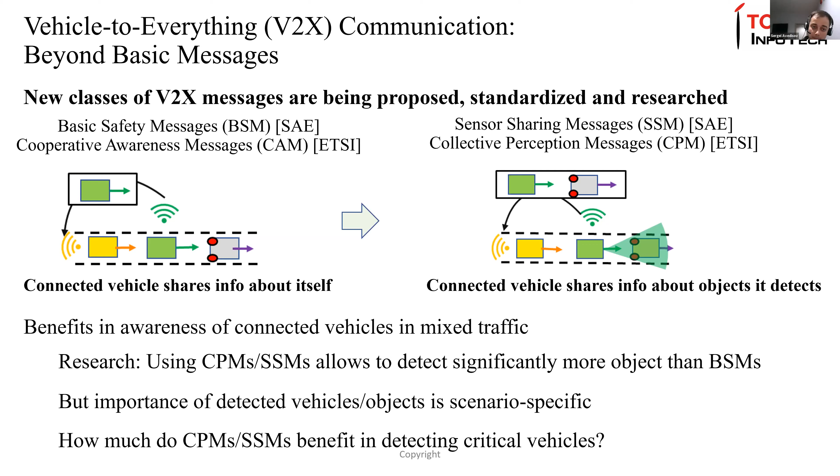What we took as a baseline is a multi-lane highway environment. In general you can have different traffic environments. We have this yellow ego vehicle traveling in a mixed traffic environment with connected and unconnected vehicles. In general, when traveling on a highway, vehicles want to perform car following and lane changes, and they want awareness during those maneuvers. This means the area of interest is usually the same lane as the ego vehicle for car following, or the adjacent lanes, which we want to pay attention to for lane changes.

Then with this perceived safety framework, we want to figure out which vehicles are critical to us. For instance, in this highway driving environment, you can usually get in trouble from a vehicle approaching you too fast from behind—we call this the rear-end safety condition. In this case, this remote vehicle approaches the ego vehicle quite fast, and that could lead to a conflict or collision.

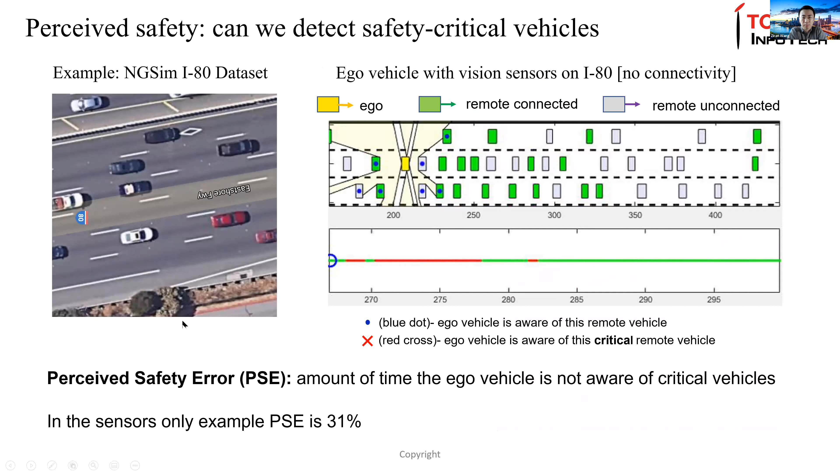Side swipe safety, yeah. In this case, these are actually independent of detection. What we look at is which vehicles are critical based on the dynamics of the scenario and the road geometry itself. So if it's a highway and the car is doing highway driving, these are the safety conditions we implement.

After that, once we set our safety conditions, which are critical for the scenario, we say that a vehicle is equipped with a given sensory set — in this case, this could be radars, camera, or LiDAR. Then, superimposing those two things gives us our perceived safety error, which is how good or how bad the sensory set is doing in this particular scenario, in capturing all the vehicles that are critical to us that don't meet those safety conditions.

And maybe I'll put this question this way: the sensor fusion you're talking about, what kind of sensors are you using, or assuming — is it radar plus LiDAR plus V2X, or what else? In this case, this was camera or radar plus V2X. So one of the perception sensors plus V2X, right? Yep.

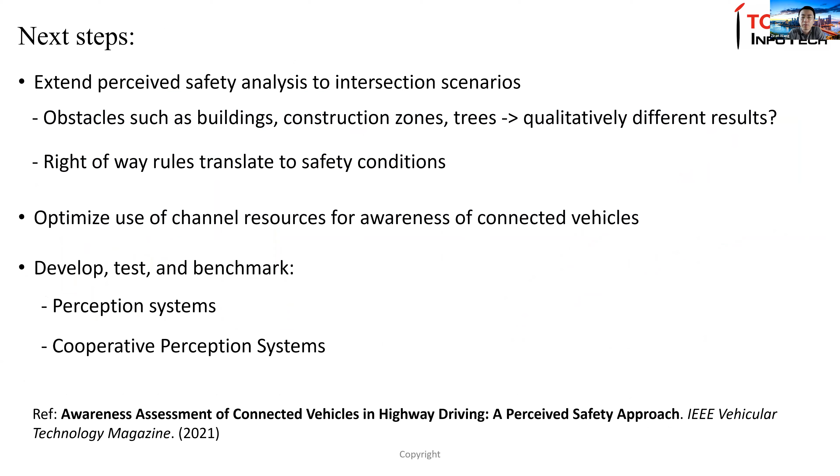And maybe one last quick one from me. If you go back to the animation, whichever one you're playing for the NGSIM data, I noticed the ratio of the length and width of the vehicle is a little bit weird. Do you intentionally put it this way, or did you make some proportional change of that?

Yeah, so in this case they're disproportional actually, and the goal was, to be honest, to fit them on a slideshow to show 300 meters in length and 3 lanes, such that it could be put on half a slide. So the ratio is weird, but it fits on the PowerPoint.

Okay, I see. But you use the real data, right? Yep, this is real data, and furthermore NGSIM by itself is not that accurate, but for this specific data set there has been a refinement process that I think a group from Italy went through, where they eliminated all the behaviors that you wouldn't see from typical car following, and that's actually the data we are using.